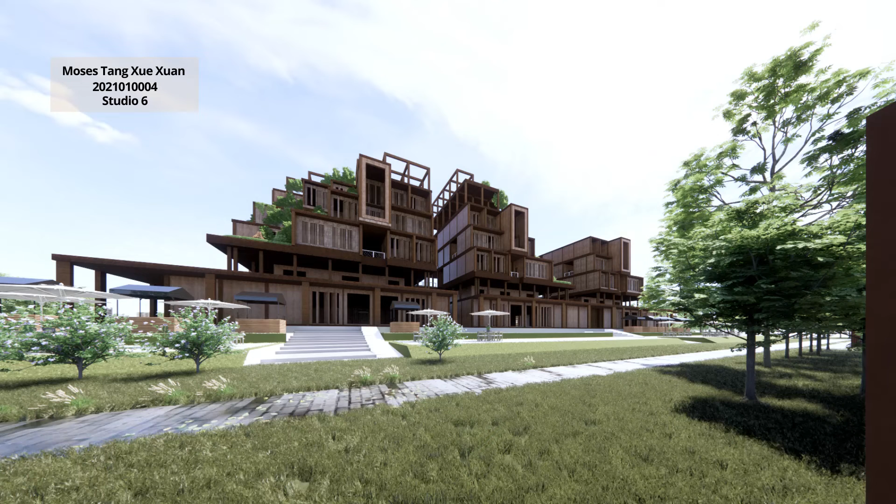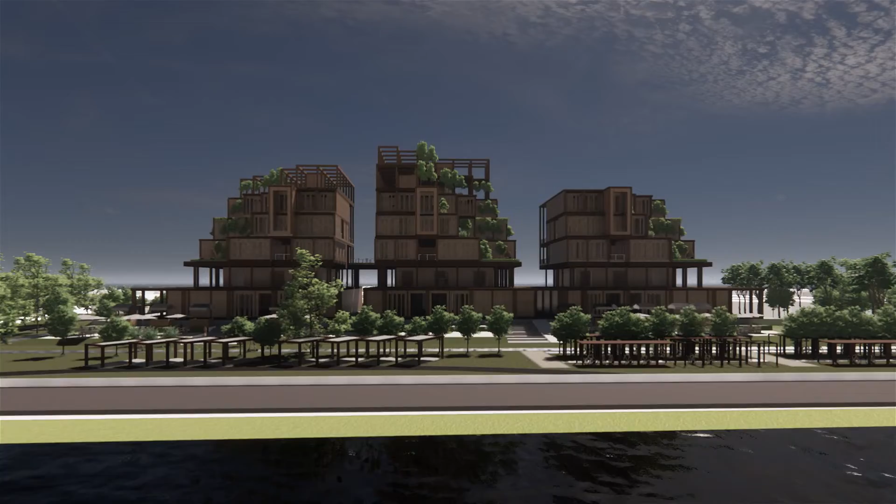I'll divide my presentation into four parts: site analysis and synthesis, concept and theme, architecture design, and lastly, landscape design.

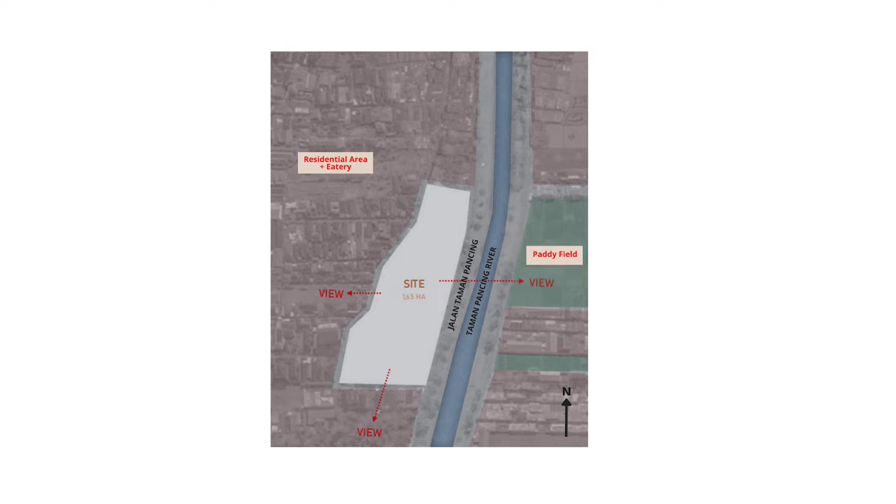The site is located in Taman Pancing Pemogan, beside a river named Taman Pancing River, surrounded by residential area and vendors' eatery, and facing two huge paddy fields. As the years pass, the number of residents increases and causes overpopulation, affecting the ecosystem around.

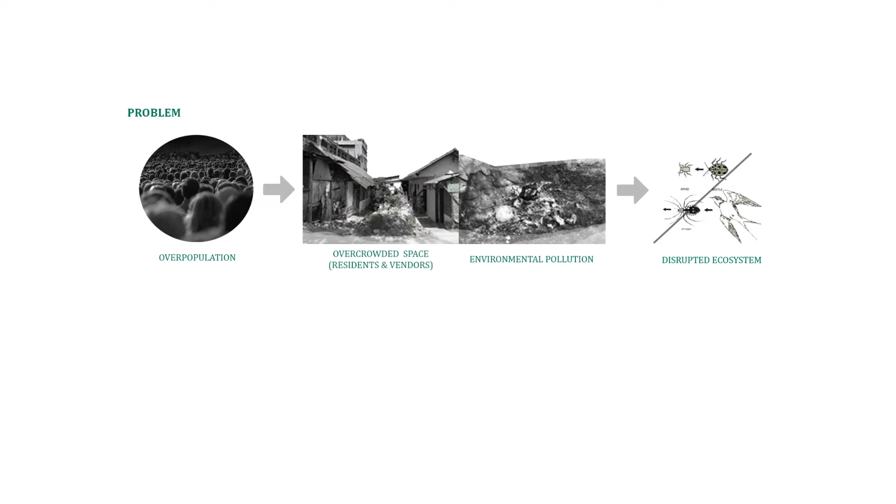To solve the overpopulation problem, a vertical building and apartment with food court is proposed to cater to the residents and the vendors.

The concept of the void is proposed with the idea to solve the ever-growing population and integrate with the ecosystem. The void concept can turn space into a bigger space when the number of residents increases, and the void can also be used as spaces connecting with the ecosystem beforehand.

To minimize the impact of disrupted ecosystem, the theme of biophilia and an idea called dwelling with nature are proposed.

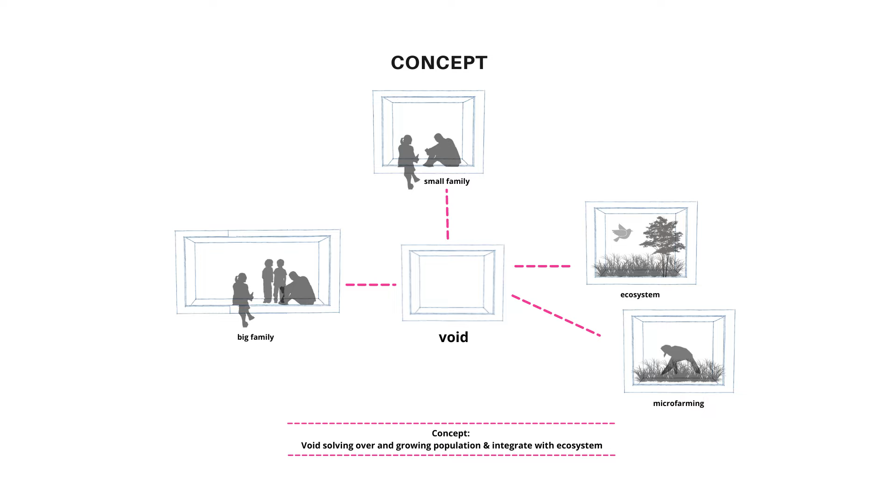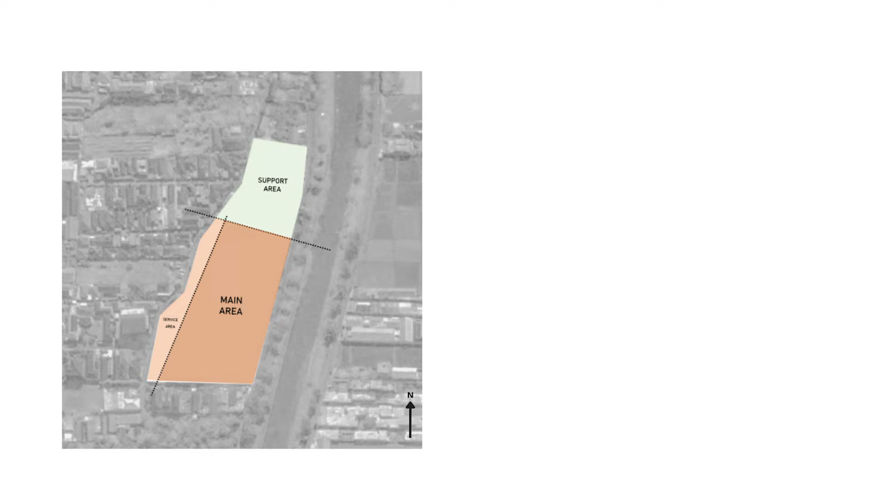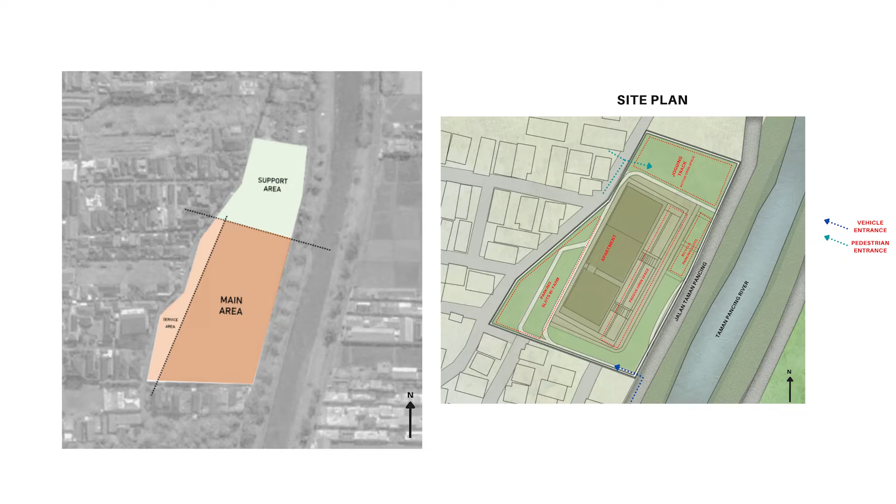Moving to the form, it starts with three masses for the three functions. The mass is then subtracted to create space for ventilation in between.

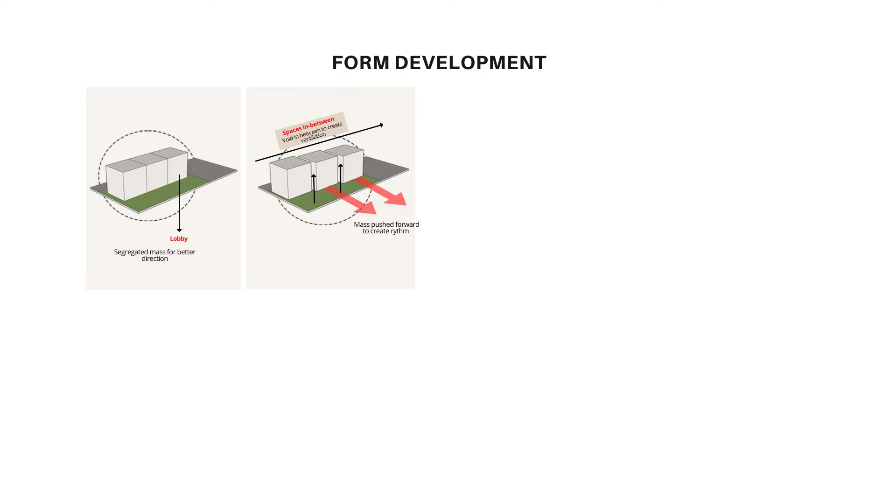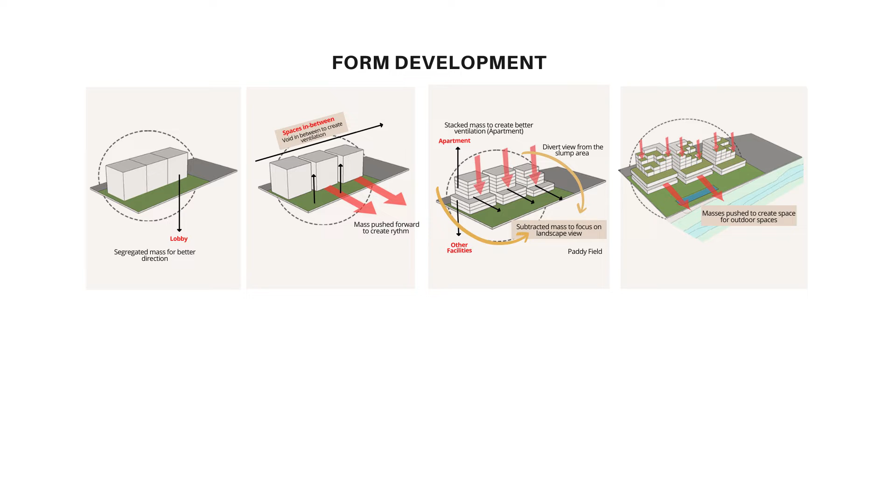Moving on, the masses are removed to create more space for outdoor green space, and the remaining masses are also subtracted to create voids to meet the concept as proposed.

The overall form is created by tons of modules which consist of cross-laminated timber wall, column, and steel joint. The module is stacked together to create the architecture of the building, and the void concept is worked by the module too.

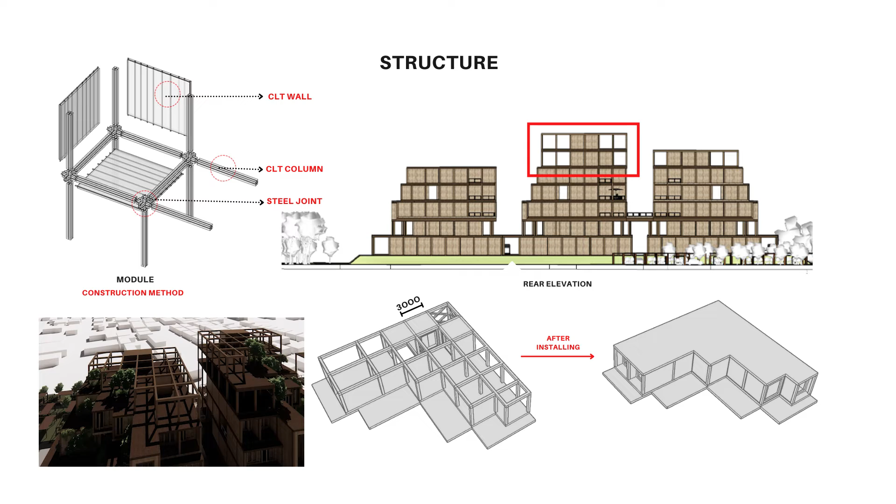Before installation, the void is used for greens, and the void can be turned into rooms after installing CLT walls. Since the wall is only 3 by 3 meters, it only requires hand carrying to install instead of a huge machine.

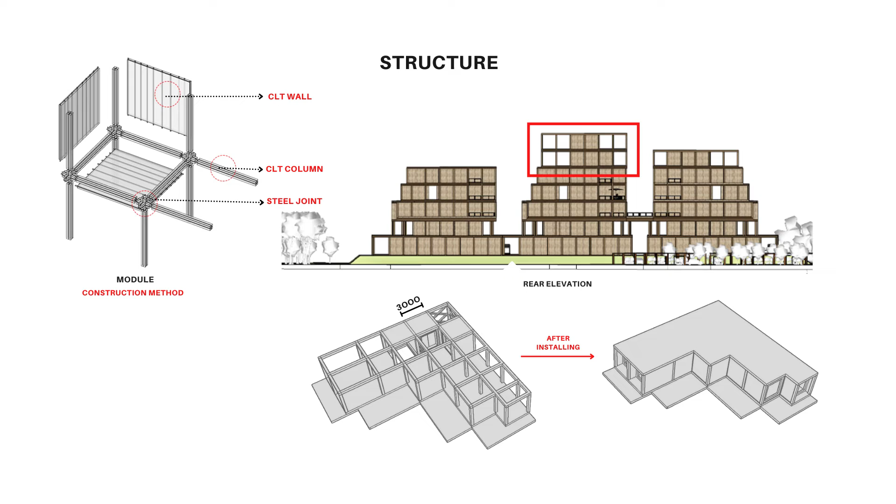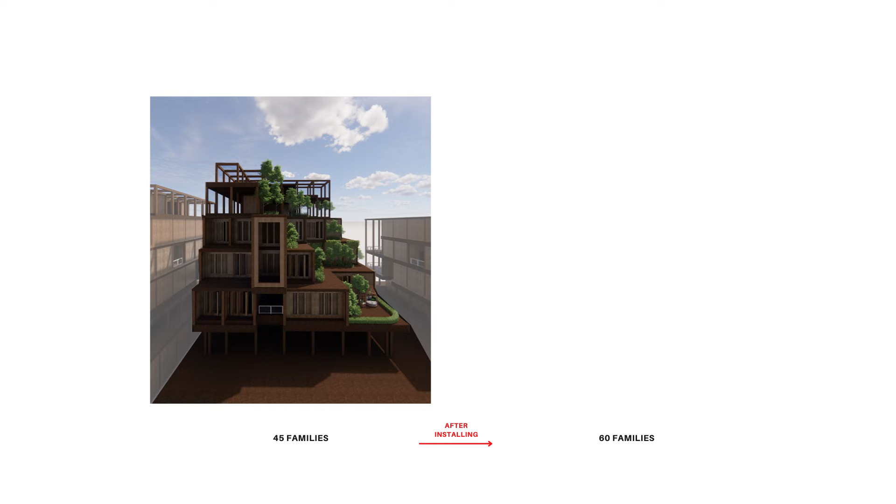Before installation, when the voids are used for greens, the apartment is able to cater for 45 families, and after installing, the building can cater up to 60 families.

Moving to the function, the building is inspired by the urban design of Pemogan, where the architecture around the site is mostly a living area on top and commercial area on the ground of the building.

As for the design, the facilities are designed on the ground and first floor, while apartments are located on the second to the eighth floor.

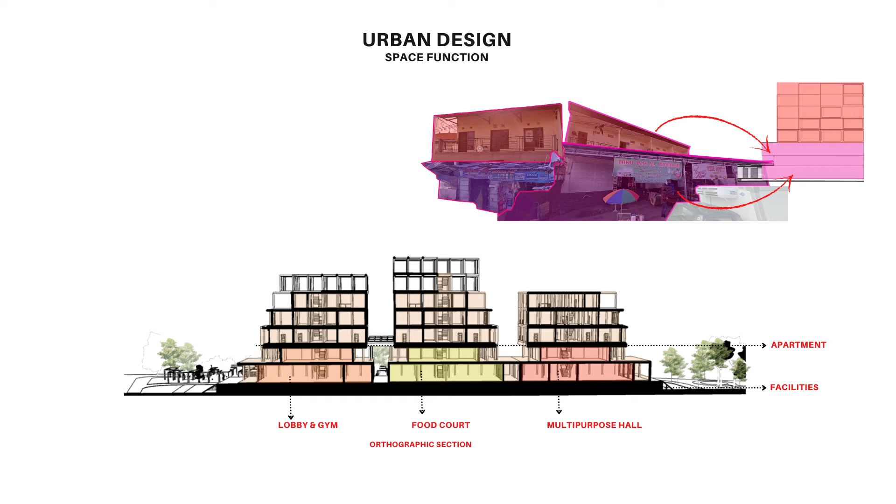As for the climate response, the sun can enter the core of the building, the elevator area, to lighten up the interior spaces, and also provide light source for the greens on the void for photosynthesis. The rain can be collected and used for toilets, watering the greens, and so on.

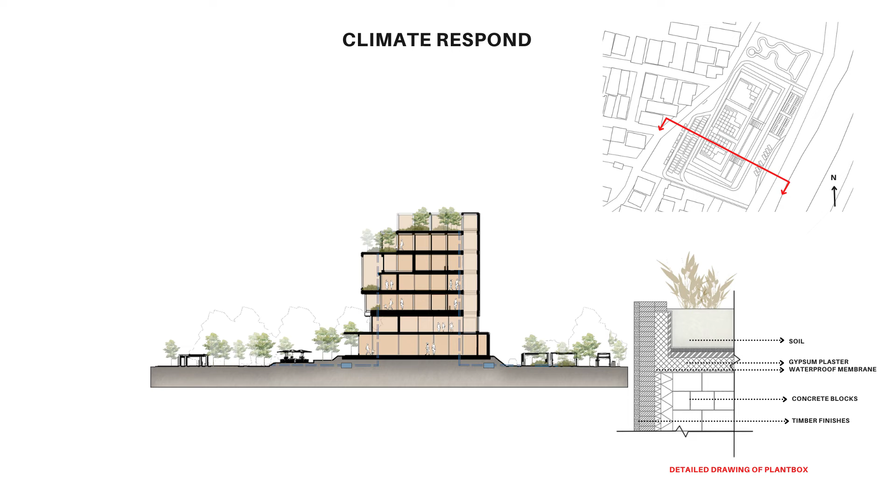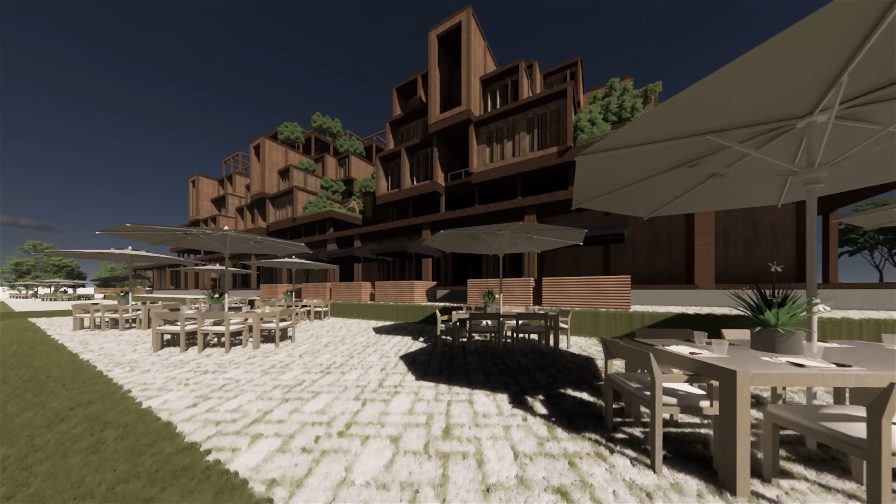Here are some of the perspective views. The food court comes with vendors to bring back the street food around the site, as vendors are the norm of the site. Next, the multi-purpose hall can be used for communal local activities such as cloth dyeing.

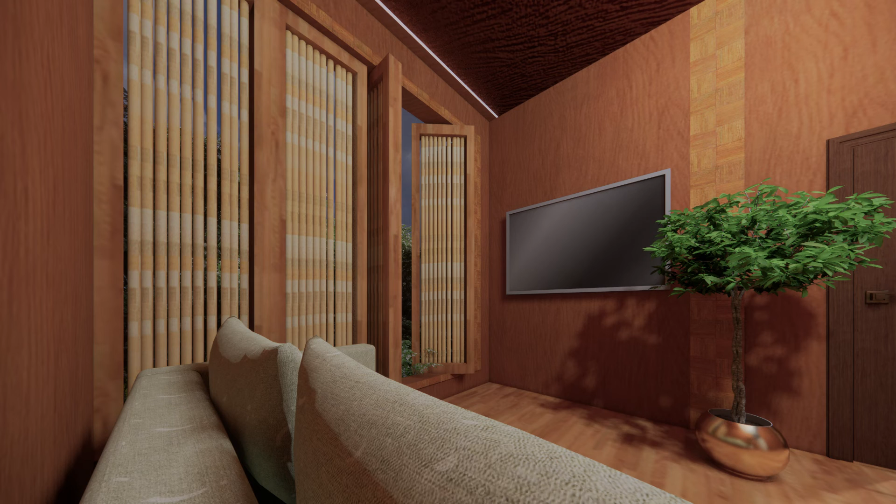And lastly, the residential area, where the facade is rotatable for sunlight to enter and allow the user to get fresh air. Moving up to the landscape, the parking slot comes with a farm slot for each driver.

The farm slot encourages the residents to plant their own vegetables. The rainwater can be used for watering the farm. Aside from that, the farm slot can generate electricity for the vendors from the heat released from the plants.

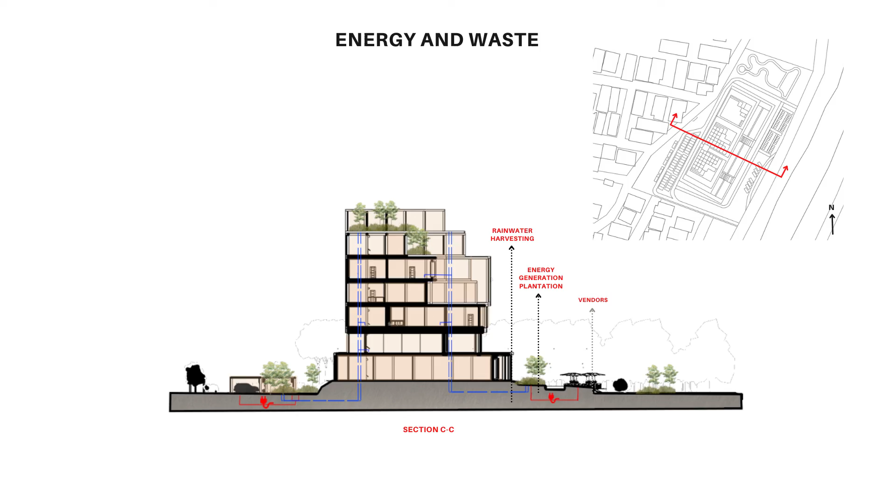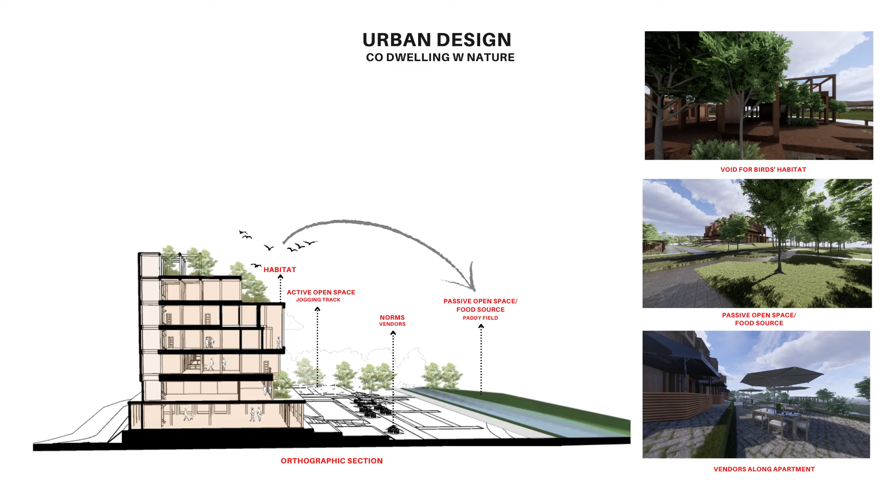The last part is the co-dwelling-with-nature concept, where the greens on the void are used as a habitat for birds after getting food from the paddy field around the site. Aside from the greens on the void, the jogging track can also be a habitat for the birds.